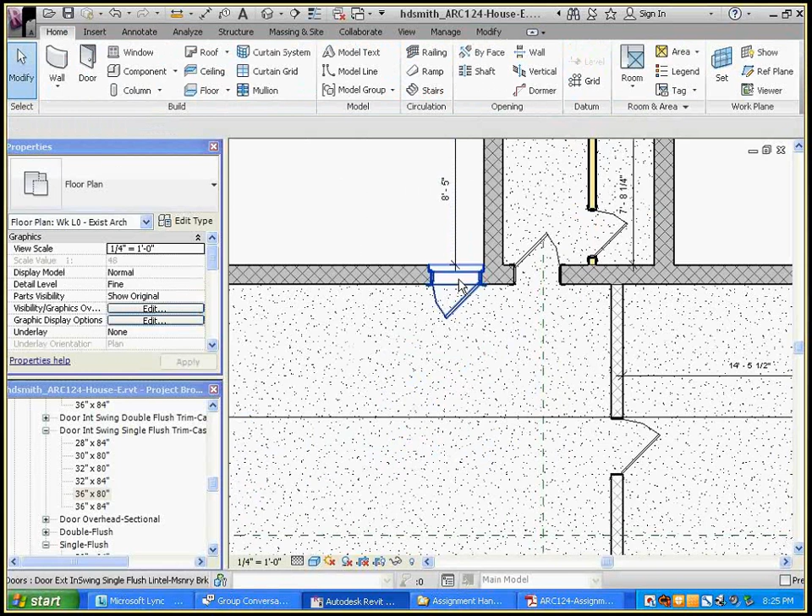I went back to the handout from D, and I placed the extra credit part, that door there, and made it 32 by 80 instead of 32 by 84, which was on the handout, because I wanted to place that so we can see when we place our pipe columns and beam, that the beam is going to encroach into the head height of that door, depending on which choice you choose for how you frame the beam.

And I'm actually going to give you a choice, so I'll talk about that. Let's start with page 1, which says create the column grids here.

So we're going to be in the work level 0 existing architectural plan. I'm going to hide these section marks - select one and do the VH shortcut to hide them, just so they don't get in my way. And since I'm done with these dimensions in this working plan, I'm going to delete them, but you don't have to.

I'm just trying to clear the deck so I can see what I'm doing. Actually, it probably would have been better to leave them there, because when you turn it in and you want to get your extra credit, at least the exterior - I want to leave the interior ones, I can delete the exterior.

You can just hide them in view and unhide them. Yeah, I could, but I don't want to hide all dimensions because I'm going to want to use dimensions to place my column grids. So I'm just going to leave them there. They're probably not going to get in my way.

And I do want to hide these elevation marks, though, because the reason I like to hide those is because then I can zoom extents without having those way out in the distance.

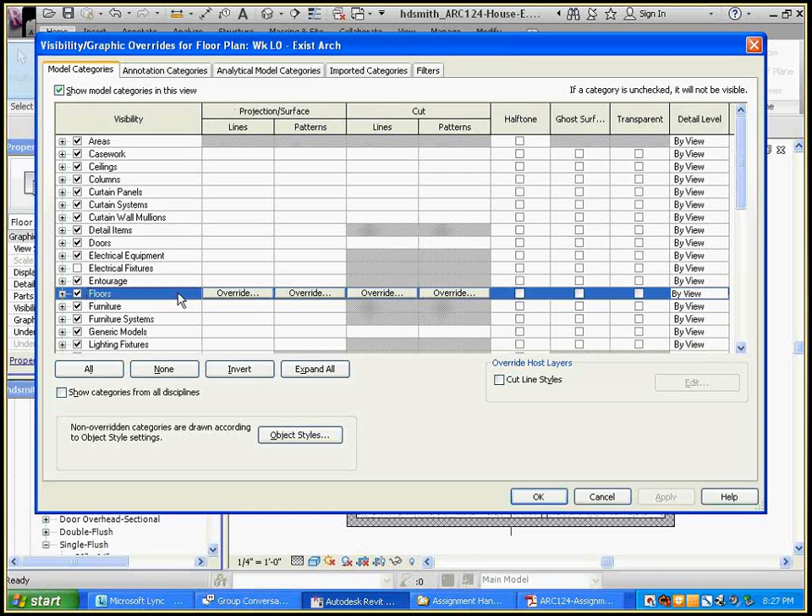So we're going to pull up the view, and turn off the floor pattern, which will help. I'm going to go to VG for that. I look for floors, but I don't uncheck floors - I don't want to turn off floors, I just want to turn off the surface pattern. So on the row of floors, I come down under Projection Surface Patterns, override it, and uncheck Visible so that it's not showing up.

Now we're ready to place our grids. I didn't really go into a lot of detail on the handout on this, but I'm going to talk a little bit more about it. So we can go to Home and Grid, but you'll also find it on Structure and Grid. This button does the same thing whether you use it out of the Structure tab or the Home tab.

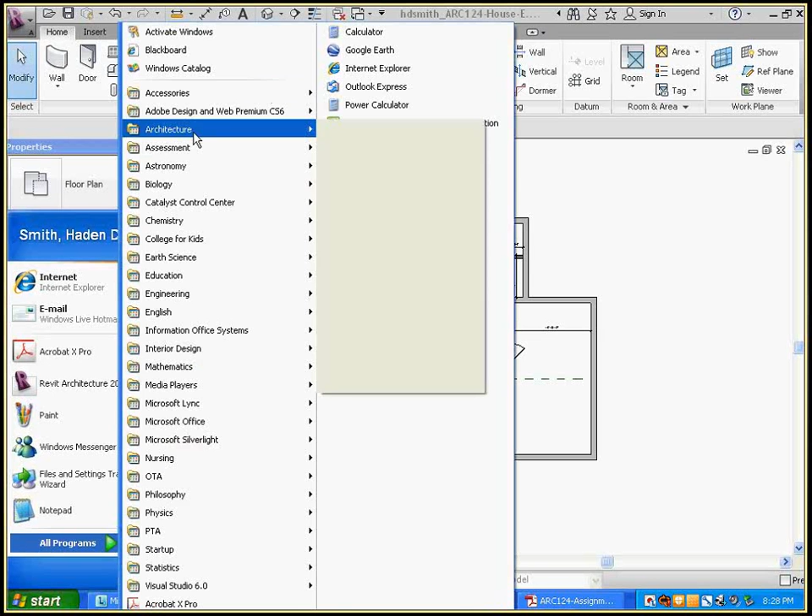By the way, just as a preview, when you get to Revit 2013, they changed the word Home to Architecture, because if you use Revit MEP or Revit Architecture or Revit Structure, if you have the combined version that you buy for 2013, they're all going to be built into one interface. They won't be 3 separate programs that you run. Whereas now, in 2012, you can go to Programs, Architecture, and there's Revit Structure and Revit Architecture. We didn't have them load Revit MEP this semester.

So anyway, let's go to the Grid button. When you place a column grid, it's very similar to placing a level. Typically, the first click is going to be a free end of the grid, and the second click is going to be the end that gets the bubble.

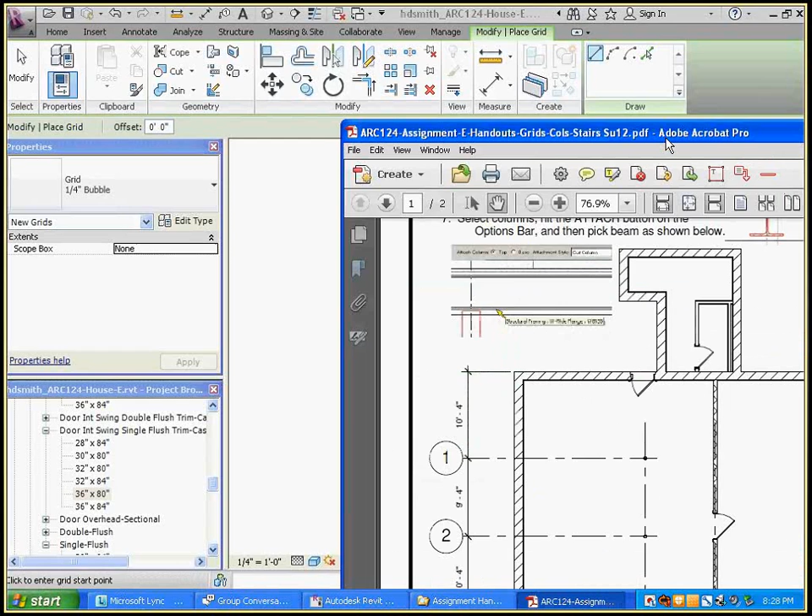So if I go ahead and look at - I don't really have a finished handout, but this view right here on my assignment sheet shows what our grid should look like. So we're going to have 1 and 2, and then A and B. But I'm going to show you what I recommend doing.

First of all, let's start with grid 1. Click one end, click the other end. Oops, I guess I missed on it first.

Yeah, I turned it on. Let me just double check.

Yeah, she's gone. Okay, so I'm going to start, and I'm going to click, just kind of eyeballing it, and click the second point over here. Revit's going to assume that's grid 1 out of the box.

Now, I think I have a 3/16 scale on my handout, so I'm going to go ahead and change that. No, it looks like I might have had an eighth scale. But I'm not going to grade based on which scale you have that view set up to when you turn it in.

Now, I can either copy that grid or I can put a new one in. They'll work exactly the same way. So I'm just going to go back to grid and I'm going to slap the second one in, but I want to line up the endpoints, which you see you'll get the little blue dotted line, so that's pretty easy to do. Escape. So it said that's going to be 2.

Now I'm going to run dimension string, just one continuous string from that face to that grid, to that grid, to that face, and I'm going to drop it down here. And I'm going to escape and grab the bubbles and stretch them over like that.

Notice when you're stretching the bubbles, and this is true for levels as well, you grab that little circle, and when you stretch one, it stretches the others that are lined up with it.

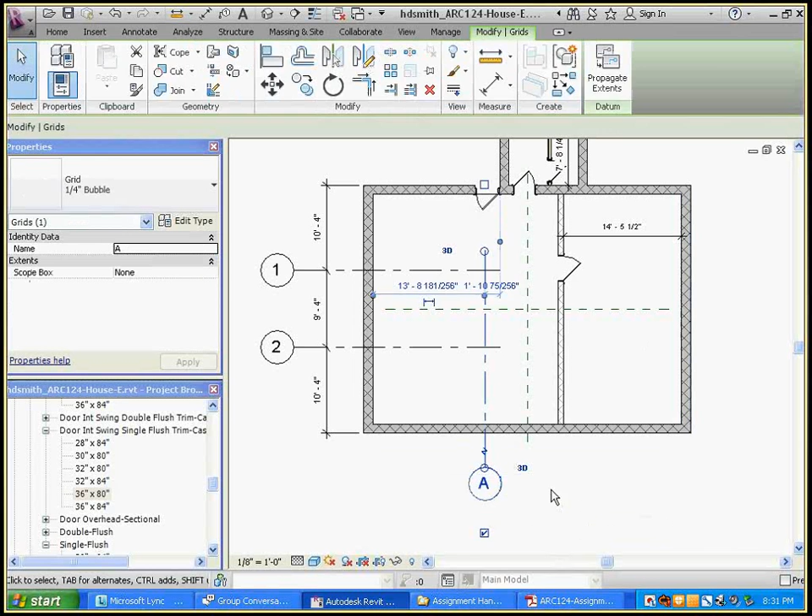When I put in the second one, whether I use the grid command or whether I copy it, either way, I'm just going to select and copy this time. When you copy that grid, it's going to call the next one B because Revit automatically increments it up one from the last one that you either placed or edited.

Now I'm going to run my dimensions, DI. Wall to grid, to center line to grid, to wall. I don't really have to pick up that center line dimension because if I make these sides both 15, 9 1/4, they'll be centered around that reference plane because we're making those two dimensions equal.

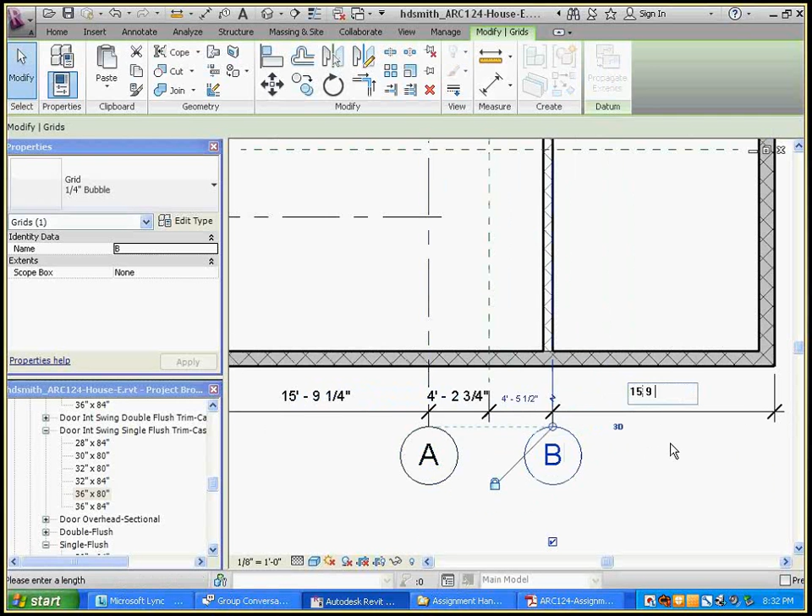There we go. Now if you print this, because normally reference planes do not print, and you have a dimension attached to a reference plane, let's go to print preview here, which is under the purple R.

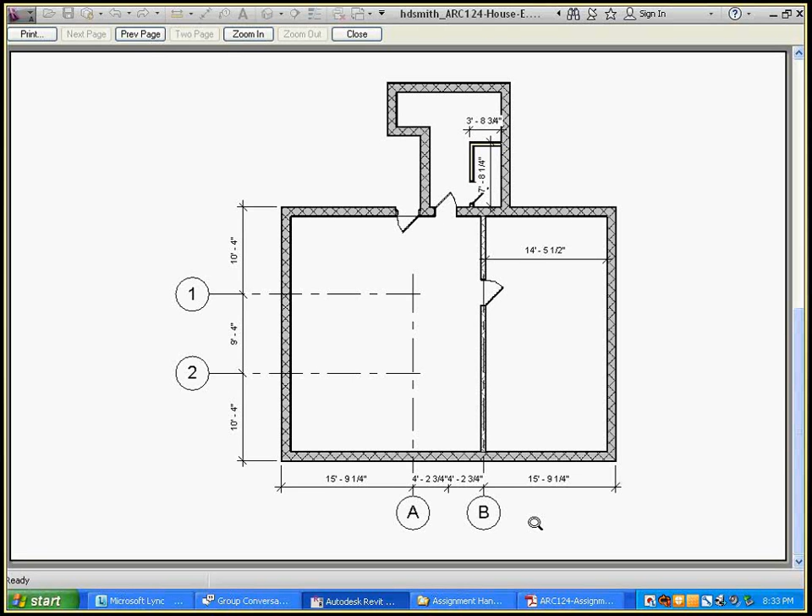Oh, they changed it. It used to be, if you hid the reference plane, then that tick mark part of the dimension string would hide—sometimes the whole dimension, sometimes just that middle section would go away, and it would look really strange. In this case, because part of the dimension is attached to things that aren't hidden, and part is attached to things that are, it leaves the whole dimension in there.

We'll get to plotting in assignment J, I think. Sheets and plotting.

So, those are grids, and now if I want to kind of stretch the endpoints a little bit, I can tweak that. I want these so that they're just crossing past the others, so I have a nice crossing intersection. It doesn't matter if that line doesn't show intersecting with that graphically, the columns will still work.

Any questions so far on grids?

4 foot 2 3/4 here on either side. But if you still have your 40 feet overall, these numbers will add up as long as you get those two outer ones correct.

When you were picking the grids, there was a little box with a check mark. Good question—Kevin asks what that box with a check mark is for. When you select the grid, the one that's checked shows there's a bubble at that end. So I can uncheck it and the bubble goes away. If I wanted a bubble at both ends, I can check the one at that end and do the same. So it's individually, grid line by grid line, that you do that.

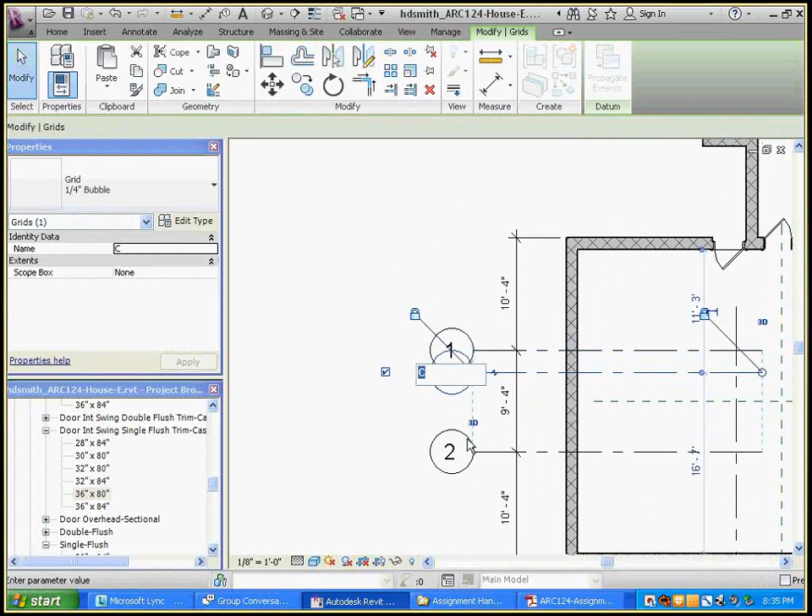Another trick I'll show you that we don't really have in this assignment, but I want you to know: on a commercial building, a lot of times you'll have grids at an even spacing, and then occasionally another grid close to one. Let's say this grid right here might be 1. I'm going to copy that maybe 2 feet down and change it to grid 1.1. If you were drawing it by hand or in AutoCAD, and wanted to show this plan at eighth scale with the grid bubbles overlapping like that, you'd draw the line, angle it out, connect it, and put the circle down here.

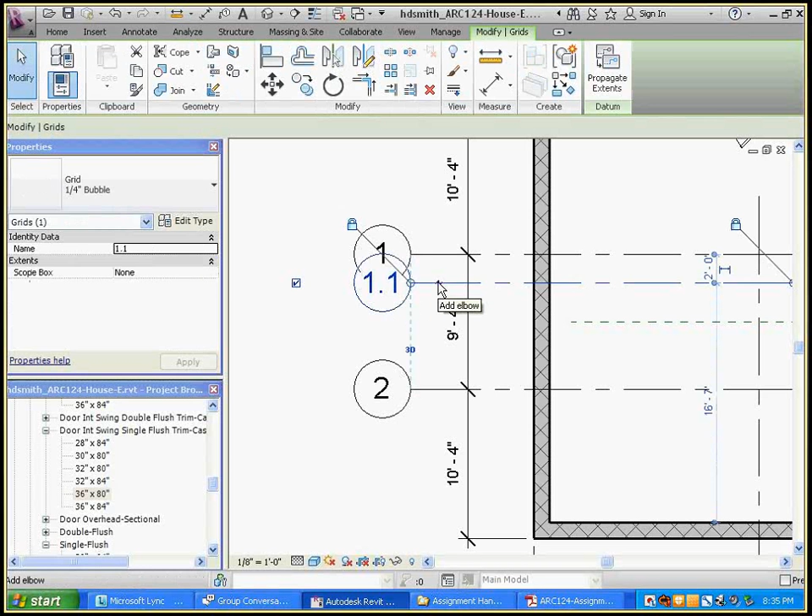Well, Revit really wants that grid line to be in space where it is, just like a level should stay at 10 feet or 12 feet or wherever it should be. But the endpoints, the bubbles, can be offset. So if you select that grid line, see this little jagged symbol—that adds an elbow. I can pull that elbow down, and now you can see the full circle for 1 and 1.1, and adjust where those go. When you pull the bubbles over, the circle is still in line with the line. It's like saying the grid line is here in space, but we've added an offset graphically so you can read the numbers.

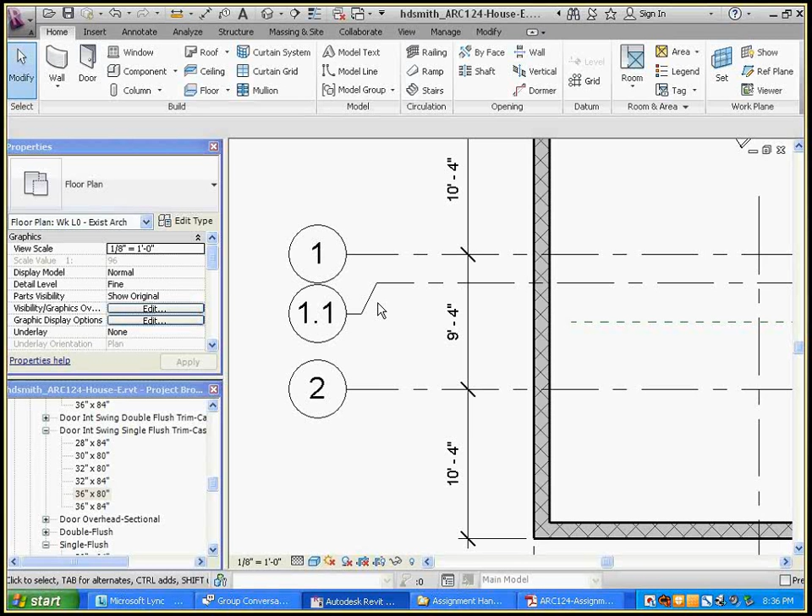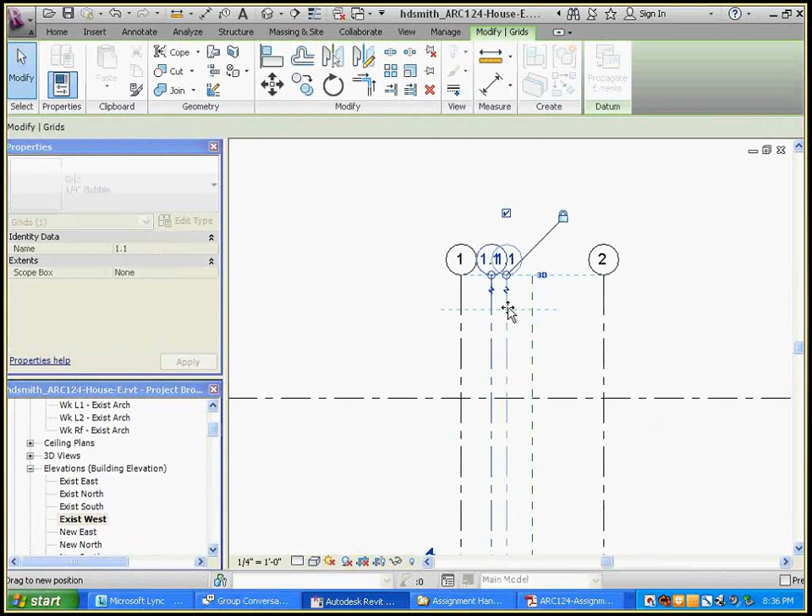It's cool—when I first started learning Revit, I thought that's the way it should work. It's an understanding that a datum is an absolute kind of plane in space. Levels are horizontal planes, grids are vertical planes. When you have two grids that intersect, that column is going to be at the intersection, going vertically up. So if I move this grid over, it should move in all my floor plans and also in my elevations. If I go to the west elevation view, existing west, those grids show up there as well. If I say that 1.1 should be further over, go back to the plan—it's been moved there too. I'm going to delete that because we don't need it. One more thing: if you wanted to straighten it out now that it's moved, select it, grab that elbow, and pull it back in line, and it clicks back into a straight grid line.

Levels work the same way. Okay, so I'll save what I have here. This is probably a good time to take a break—we're kind of midway through. So I'm going to stop this recording, and I'll call that session 5, grids.